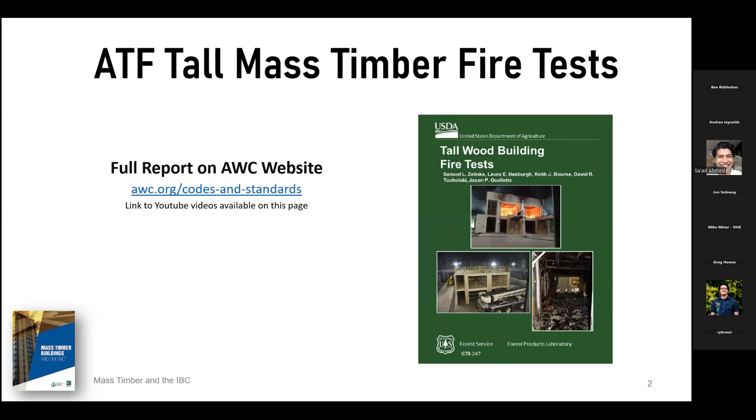So that's all with the ad hoc committee. Again, they came in there with 17 different code change proposals, some Group A, Group B stuff. If you're familiar with how the ICC code process works, they came in with 3 brand new types of construction, new heights and areas and number of stories, multiple fire safety requirements, some requirements for safety during construction as well, which we'll talk about towards the end here, and then some exterior wall tests and things like that.

But I think because they had so much involvement, all 17 proposals that they put forward all went into the code as recommended. If anybody's a glutton for punishment, if you want to go back, they do have the hearing videos, all the hearing documents, all that stuff. You can go back and watch those videos if you're ever interested, or if you can't fall asleep at night.

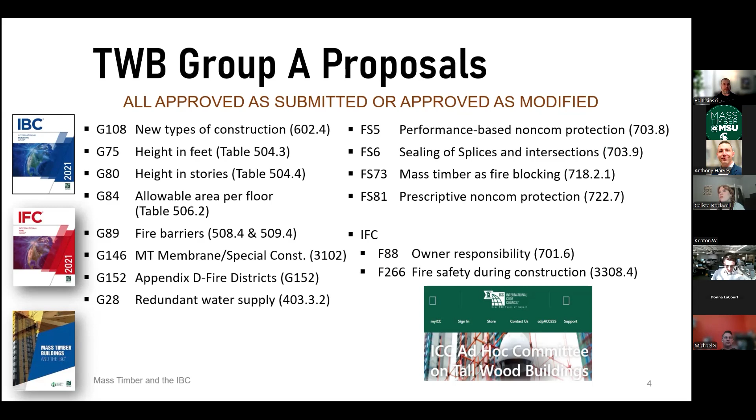These are those code change numbers for the Group A and then for the Group B. But again, we'll go through what these all are a little bit as we go here.

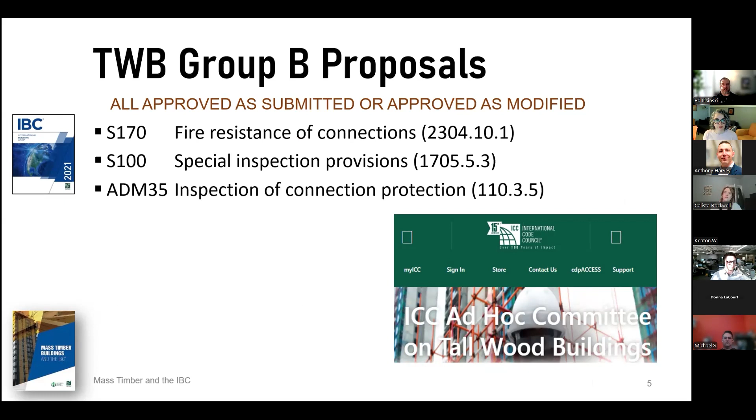So first off, we'll start off with definitions, and this one I always have to throw out there. We have MassTimber at Michigan State. We use MassTimber quite a bit. The actual, when you go into the code, definition of MassTimber is structural elements of type 4 construction, primarily of solid, built-up, panelized, or engineered wood products that meet the minimum cross-section dimensions of type 4 construction. The most important part of that is structural elements of type 4 construction.

So you can use heavy timber throughout the code. You can use heavy timber in type 1, 2, 3, 5 construction, as well as type 4 construction, of course. But if you're using it in type 1, 2, 3, or 5, it's technically heavy timber in the code. If you see a provision that says mass timber in the code, you're only talking about a type 4 building. So a lot of the buildings that we see, they're type 3 or they're type 5, but they're utilizing heavy timber elements - they're using CLT, glulam beams and columns, things like that. While a lot of people will call those mass timber buildings, and they're utilizing the same products as mass timber, they're technically heavy timber buildings, unless it's a 4A, 4B, or 4C, which is the 3 new types of construction that we'll get into in just a second.

That's when you actually have mass timber. So do keep that in mind. If you're going through the code and you see that term mass timber, that's now only pertinent for type 4A, 4B, and 4C construction. Anywhere that you see heavy timber, you can utilize that elsewhere throughout the code.

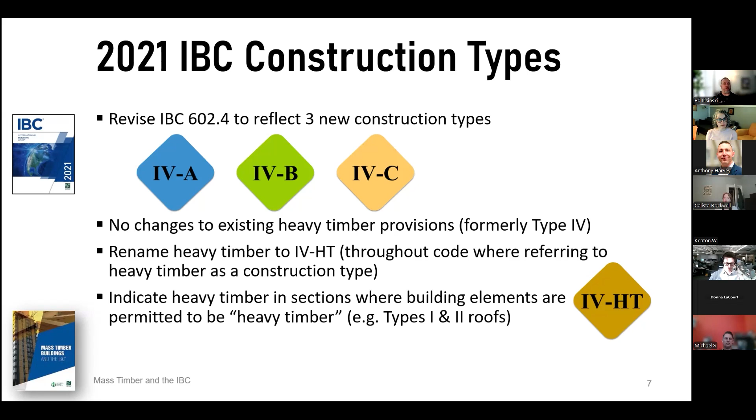Here's a little side-by-side comparison of those three new types of construction. Type 4A is going to be your biggest, tallest type of buildings. But the unfortunate thing for wood lovers is that 100% of the wood surfaces have to be covered up with non-combustible protection. So you're not going to see any wood when you walk into that 4A building.

I get asked all the time, why would somebody build to that? Well, there's still tons of environmental benefits, with sequestered carbon and things like that. There's speed of construction, there's lighter foundations. I'm preaching to the choir here, but there's a lot of benefits of still building with wood, even if you can't see that wood. That's going to be your biggest, tallest buildings out there.

Type 4B requires 100% non-combustible protection on all surfaces, with some limited exposed mass timber elements. So now we can have some ceilings exposed, some walls exposed, some individual columns exposed, things like that. We'll talk about when, where, and how much you can do as we go through this.

That's sort of your 4B buildings. Then your Type 4C - all that wood can be exposed, with three exceptions: the interior and exterior of shafts still have to be covered up with non-combustible protection, the exterior side of exterior walls has to be covered up, and concealed spaces again have to be covered up with some gypsum. But otherwise, for the most part, all your walls, ceilings, columns, and beams for the majority of the interior of your building in Type 4C can be left exposed, which is beautiful. But then that's going to be your shortest and smallest out of these three new types of construction.

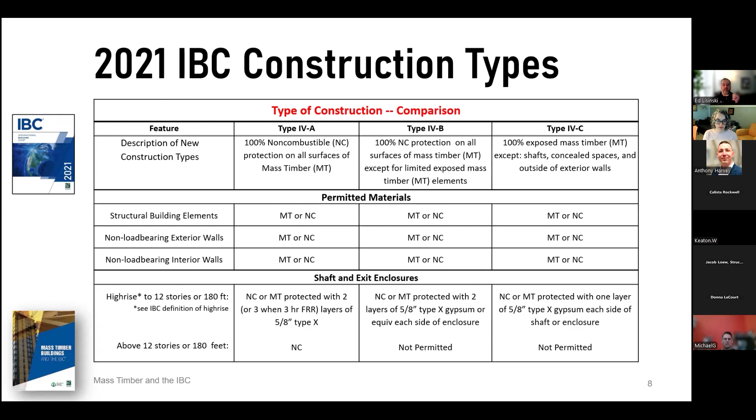So again, mass timber meeting those heavy timber sizes or non-combustible structural elements for interior and exterior walls. Down toward the bottom, the shaft and exit enclosures for Type 4A buildings - once you get above 12 stories, it's got to be a non-combustible stair and exit enclosure shaft. But otherwise, at 12 stories or less, you can use mass timber or non-combustible, and same thing with Type 4B and 4C. We'll talk about each of those as we go.

One last side-by-side comparison: Type 4A, non-combustible protection throughout. 4B, some limited exposure. 4C, pretty much you can leave all your wood exposed. We'll dive into a little more detail on each of these three types of construction.

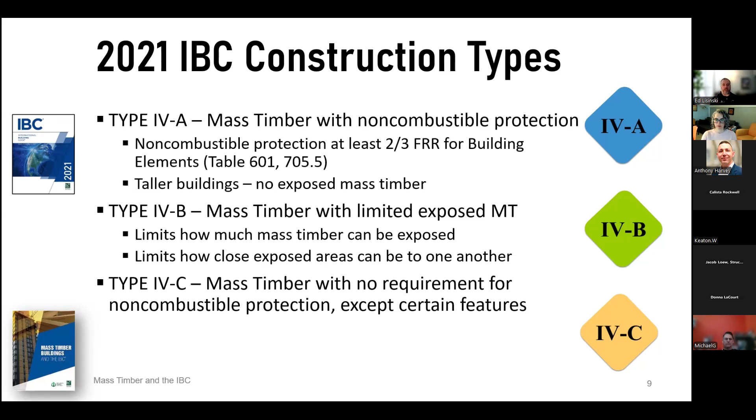All right, definitions, let me jump back to that. I mentioned it a little bit, but non-combustible protection for mass timber - that's non-combustible material in accordance with section 703.6, designed to increase fire resistance rating and delay the combustion of mass timber. Non-combustible protection for mass timber is going to be very important throughout the code. It's typically going to be 2/3 of whatever your fire resistance rating is, but we'll take a look at that in just a second. But again, this is just for mass timber - it doesn't apply to heavy timber if you're using that in any of those other types of construction.

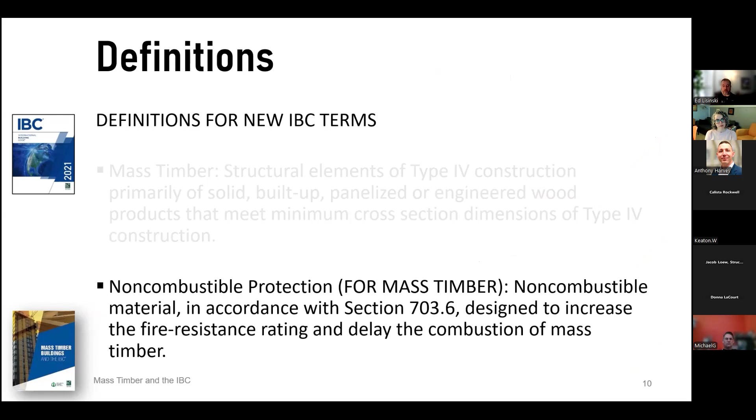So how do we come up with that amount of fire resistance protection that we need? Chapter 703.2.2 gives you all the different methods for establishing fire resistance in the code. One of those is fire resistance per section 722 - that's all the material specific stuff: concrete, masonry, steel, they've got their own sections in 722, as does wood. So one of those sections that was brand new in the code, 722.7, fire resistance rating of mass timber.

So I'm going to read this to you: the required fire resistance of mass timber elements in 602.4 - that's your occupancy chapters or your types construction chapters - shall be determined in accordance with 703.2. That's what we just looked at. That sent us here. The fire resistance rating of the building elements shall be as required in the code in 601 and 705.5. For the designers out there, if you're not familiar with table 705.5, that used to be table 602 - that's your fire resistance rating of exterior walls based off of fire separation distance. They moved it into chapter 7 with the exterior wall requirements. So as you're moving into the 2021 code, you'll see that table moved from chapter 6 into chapter 7 in 705. So that's what that table is if you're not familiar.

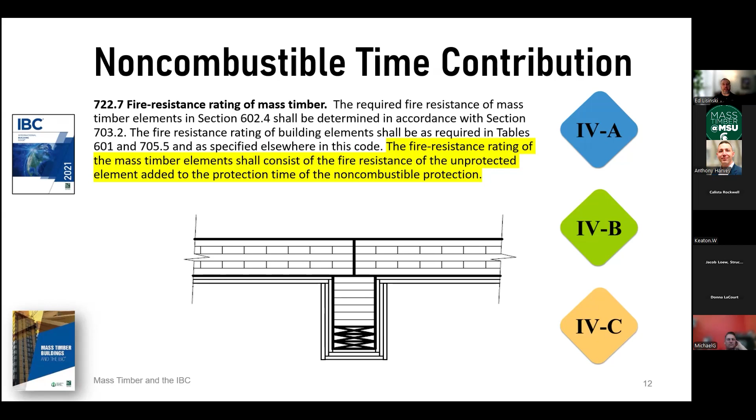The fire resistance rating of the mass timber element shall consist of the fire resistance of the unprotected element added to the protection time of the non-combustible protection. So as you guys are all aware, mass timber or heavy timber itself has some inherent fire resistance rating and some fire resistant qualities to it. So you're going to add how much mass timber itself has some fire resistance qualities, and then add the amount of protection given by that non-combustible protection to that, and that's going to be your fire resistance rating, of course.

So it goes on to talk to 722.7.1, which is your minimum time that's required, established by 602.4.1 through 602.4.3 - that's your 4A, 4B, and 4C construction. Non-combustible protection shall be provided for mass timber in accordance with 722.7.1(1) with that table. So let's take a look at that table in just a second here.

Here is your fire resistance rating based off of table 601 or 705.5, and then how much non-combustible protection you have - how much of that gypsum you need to put on there. So if you have a 1-hour wall, you need 40 minutes of non-combustible protection, of gypsum protection on there. If you've got a 2-hour column, you need 80 minutes now of non-combustible protection. And I say gypsum, but that could be any type of non-combustible materials installed there. And if it's a 3-hour floor, 3 hours primary structural frame, 120 minutes is going to come out of that non-combustible protection. So you'll notice that 2/3 ratio - you'll see that throughout the code. 2/3 is going to come out of the non-combustible protection, 1/3 is going to come out of the mass timber itself.

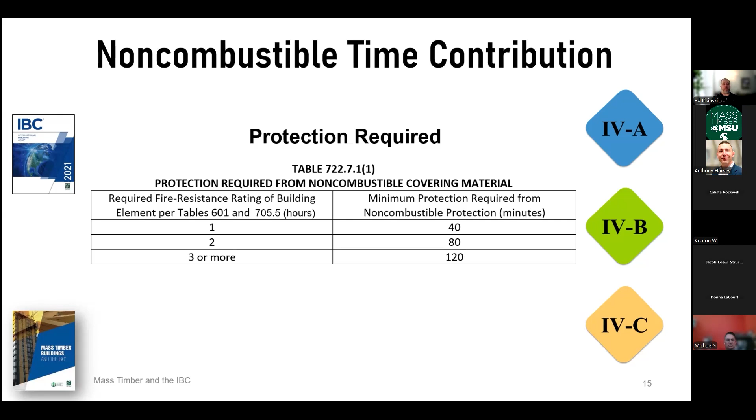Moving on to 722.7.1, the second sentence says the rating in minutes contributed by the non-combustible protection shall be established in accordance with 703.6. So 703.6 is going to give you a performance method of coming up with that non-combustible protection.

Basically you're going to run an ASTM E119 test, one test with just the mass timber on its own, and one test with the mass timber having a non-combustible protection, whatever you're trying to test. If the mass timber on its own burns out in 3 hours, and the mass timber with the non-combustible protection burns out in 4 hours, you compare the two times, 4 hours minus 3 hours, so whatever you put on that mass timber provided 1 hour of protection. That's the performance method.

You can go through that and say whatever we applied gives me 1 hour, or 40 minutes, or whatever that time difference is, and then put that into that table we just looked at. Not a lot of people are going to do that—it's obviously expensive and time consuming to run two ASTM E119 tests or UL 263 tests.

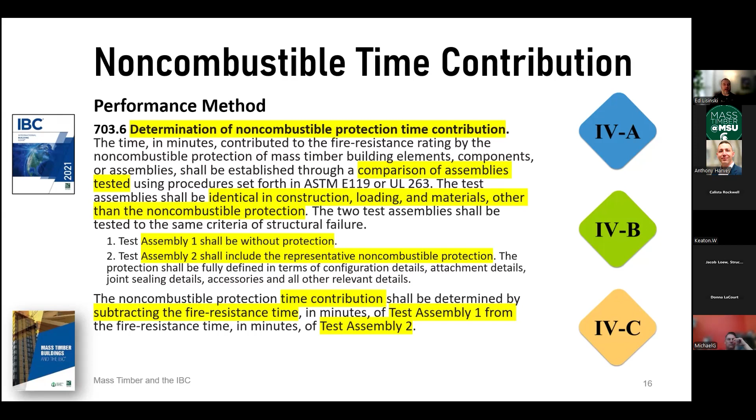But that is an option out there. It might be an option for newer products that come onto the market that aren't recognized by the code yet, or might not have an ICC-ES report yet. The last sentence of 722.7.1 says the protection contributions indicated in table 722.7.1(2) shall be deemed to comply when fastened in accordance with 722.7.2. So let's take a look at table 722.7.1(2).

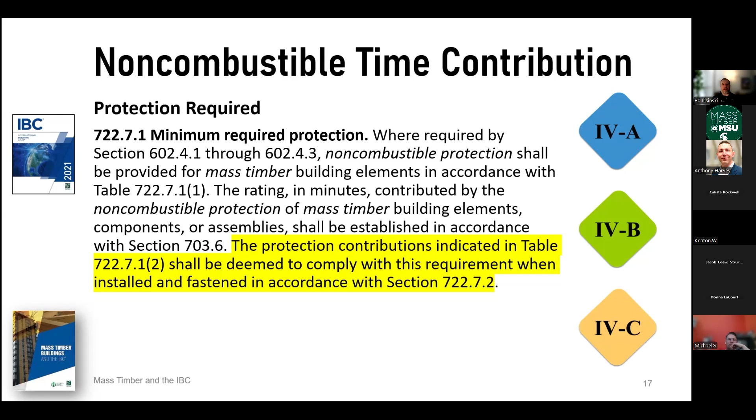That's going to again be a deemed-to-comply table, giving you a prescriptive option where 1/2-inch type X gypsum gives you 25 minutes, and 5/8 type X gypsum gives you 40 minutes of protection.

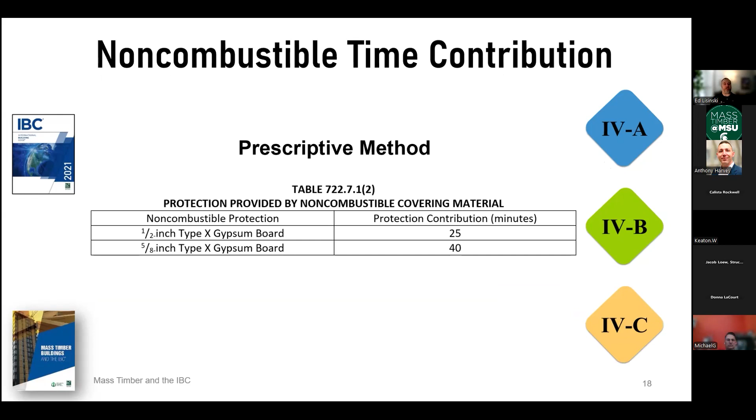Now if we compare those two tables together, it makes really obvious what everybody does with this. If you need a 1-hour wall, you need 40 minutes of non-combustible protection—well, one layer of 5/8 type X gives you that 40 minutes. If you need a 2-hour column, 80 minutes of non-combustible protection—2 layers of 5/8 type X gives you that 80 minutes. A 3-hour primary structural frame needs 120 minutes, and 3 layers of 5/8 type X gives you 120 minutes.

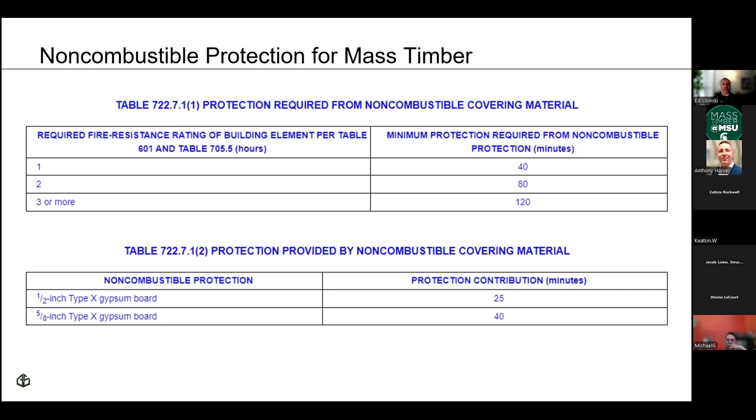So if you need a 1-hour fire resistance rating, put on 1 layer of 5/8 type X. For a 2-hour rating, 2 layers. For a 3-hour rating, 3 layers of 5/8 type X gypsum, and you're good to go. Again, then you don't have to go through any of that testing—that just gives you a prescriptive option in the code for how to comply with that fire resistance rating.

Now, it did say you have to install that correctly per 722.7.2. These are some of the rules in there—there are a couple others—but that non-combustible protection has to be tight to the mass timber itself, and screws have to penetrate at least 1 inch into the mass timber. Screws shall be spaced no more than 12 inches on center in each direction.

The tricky one is when you get into a second layer—the screws from one layer to the next have to have at least 4 inches of separation between them, they can't be closer than 4 inches to each other. So it's 12 inches on center for one sheet of gypsum, but when you have that second layer, you need at least 4 inches minimum separation from one layer to the next.

How do you do that? Good luck, obviously, but for the contractors out there, it's really just about laying out your screw pattern and making sure your contractors are aware of that rule. Make sure they're probably going to have to measure out where those screws go. Obviously, if it's only 2 layers, you can go 6 inches on center, and you've got a couple inches of leeway in each direction, but just make sure your drywall contractors are aware of that.

Screws go at the panel edges, between 1 to 2 inches from the edge. The panel offset from one layer to the next of gypsum has to be at least 18 inches. Once you get into 2 or 3 layers, that's just from the adjacent layer, so you're not worried about that 18-inch offset from the first layer to the third layer if you have 3 layers. You're going to have a stair step profile - we'll take a look at all that. Then the screw heads and panel joints all get covered up with joint compound.

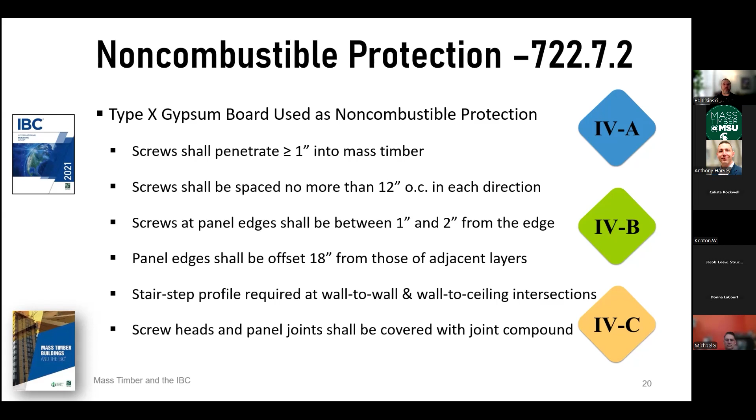One other thing not shown here: when you have that third layer, you can put furring strips in between the second and third layer to give you a little bit of space, which is sometimes helpful. So here's what that looks like graphically.

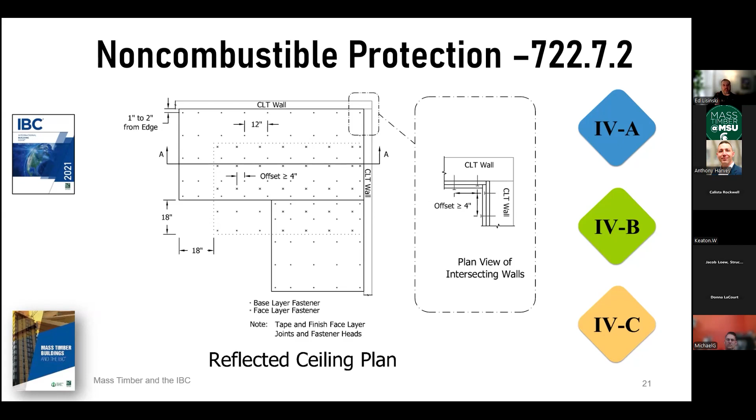You'll see on the wall detail in the corner on the right-hand side, we need that stair step profile into the corners. So if you need 2 layers of gypsum on the walls, do the first layer on the east wall, then the first layer on the north wall, your second layer on the east wall, your second layer on the north wall. You can't do first layer, second layer on the east, and then first layer, second layer on the north, because they don't want that seam going all the way through - they want to make sure you're covering up that seam as best you can.

Same thing on the ceiling - this is a section detail of a wall and ceiling intersection. Most contractors want to do both ceiling layers first if everything needs 2 layers - both ceiling layers first, then both wall layers. But again they want that stair step profile: first ceiling layer, first wall layer, second ceiling layer, second wall layer. You have to step those through like that.

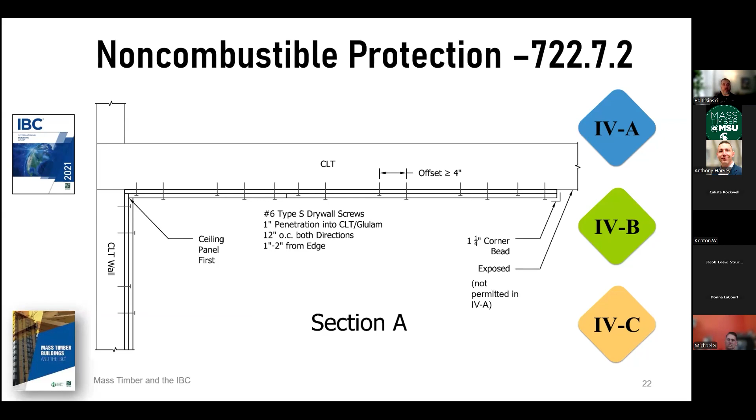That's all detailed in 722.7.2 in the code, and that's if you're going to use that prescriptive option. If you're not going to use that, if you're going to go through with the performance option, then it's going to depend on how that was tested and how that product itself works. I see a couple questions popping up, but I'll take those at the end - definitely keep getting those in as you go through.

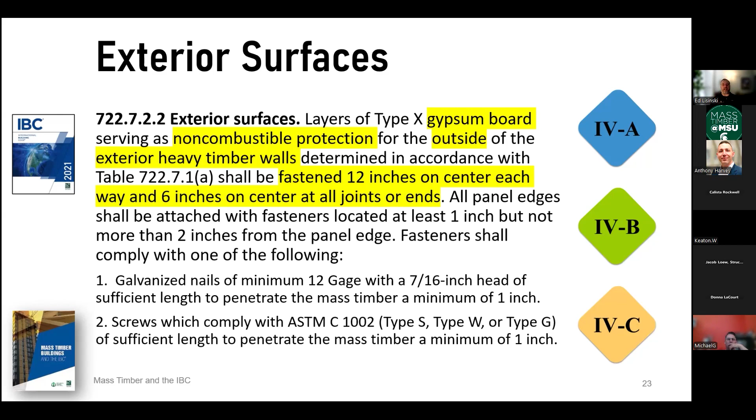722.7.2.2 talks about exterior surfaces - I mentioned this with the 4C, but also 4A and 4B, all 3 types. When you have an exterior heavy timber or mass timber, like a CLT panel, for your exterior wall, that all has to get covered up with at least 1 layer of 5/8 type X. There are nailing or screw patterns for that as well: 12 inches on center in the field, 6 inches on center on the joints and ends, and then some requirements for those exterior screws.

The type 4A actually matches type 1A for fire resistance rating. For the designers in the room, when you think about a type 1A building - that's your unlimited area, unlimited story, skyscraper, everything completely non-combustible type building - that level of fire resistance rating and protection is exactly what you have in a type 4A building. You've got 3 hours on your primary structural frame, 3 hours on your bearing walls, 2 hours on your floor construction, and 1.5 hours on your roof construction.

The provisions for the 4B and 4C were all taken from type 1B, so you'll see those all mirrored over. 2 hour fire resistance rating on your primary structural frame, 2 hours on your bearing walls, 2 hours on your floor, and then 1 hour on your roof construction for those. Again, your fire resistance rating is going to come in depending on whether or not you have that non-combustible protection. We'll talk about that as we go.

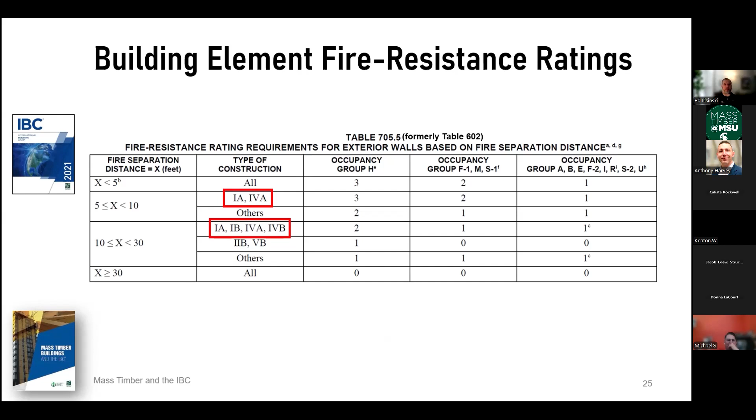All right, so exterior walls, we'll take a little cross section here of each of these different types of construction, starting with the 4A. This is an exterior bearing wall. So again, if you recall back here, exterior bearing walls are going to be 3 hours for type 4A.

So you'll have on the interior side 3 layers of 5/8 type X gypsum, and that's going to provide 120 minutes of the 3 hour protection. The other 60 minutes that's coming out of there is going to come out of the CLT itself, or the heavy timber element that's in there. So 2/3 of that is going to come out of that non-combustible protection.

Again, keep in mind that you have 1 layer of 5/8 type X required on the exterior side of exterior walls. And like I mentioned earlier, between that second and third layer, you can do a furring channel if you want to on that. Might be a good way to slide in a little bit of insulation, maybe hide some electrical conduit, things like that. But you are permitted to have that furring channel in there.

Keep in mind, if you are closer than 10 feet to a fire, if your fire separation distance is less than 10 feet, now you're also worried about fire coming in from the outside. So you would have 3 layers of gypsum on the exterior side of that exterior wall as well.

One thing I will mention while we're at it here, and I'm sure a lot of the designers are aware, we're going to talk about the CLT as an exterior wall. A lot of times in Michigan, same thing in Wisconsin here, just because of our climate zone and stuff, typically you're going to end up with a typical curtain wall system on the exterior walls, just so you can get that insulation value. I think I pulled that out of this presentation, but when you get into the energy code, if you have a thick enough CLT panel on the exterior wall, you can get into a mass wall situation where you need a lot less insulation on that. But for the most part, though, if you have a thinner CLT panel out there, you're not going to qualify as a mass wall, so you're going to have some decent insulation on there.

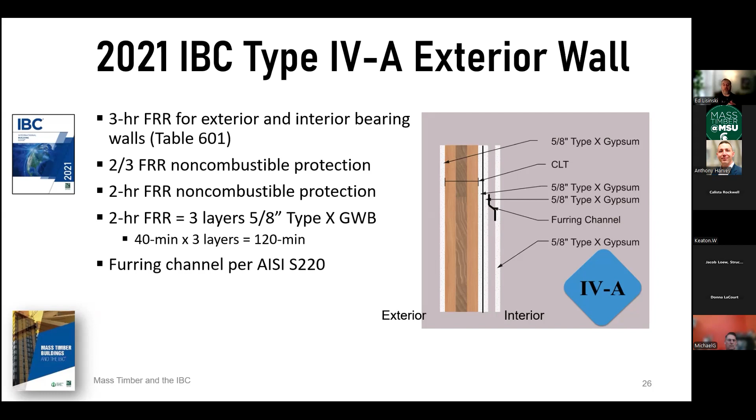Again, you obviously can't put it in that wall, and you need that non-combustible protection to be tight. You also can't have any combustible elements outside of the CLT other than a water-resistive barrier. So you can't put any combustible insulation on the outside. So again, that's where you'll get a lot of curtain wall systems, your typical curtain wall systems on the exterior of buildings up here in the northern states. But you still could possibly do it though with CLT. I don't want to discourage you from that.

Yeah, type 4A, we'll jump through that. Here's sort of a mock-up of what that 4A is going to look like. We'll go through each of these a little bit more with how much height and area and stuff you can have. But again, all the mass timber has to have the non-combustible protection, interior and exterior.

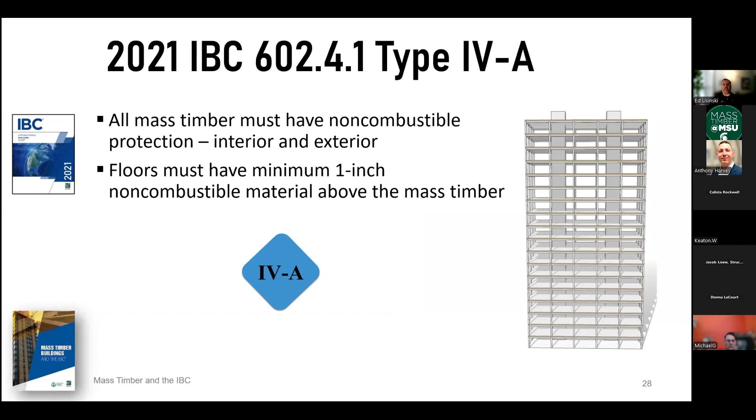And then floors do have to have a minimum 1-inch non-combustible material on top of the mass timber. I didn't mention that earlier, but there is a requirement in 4A and 4B for a 1-inch non-combustible material. Now that can just be lightweight concrete, gypcrete, something like that. It's different from that non-combustible protection that's required. This is just a non-combustible material. It doesn't have to be tight. You can have some insulation in there as well if you want to. But again, that's a requirement in 4A and 4B.

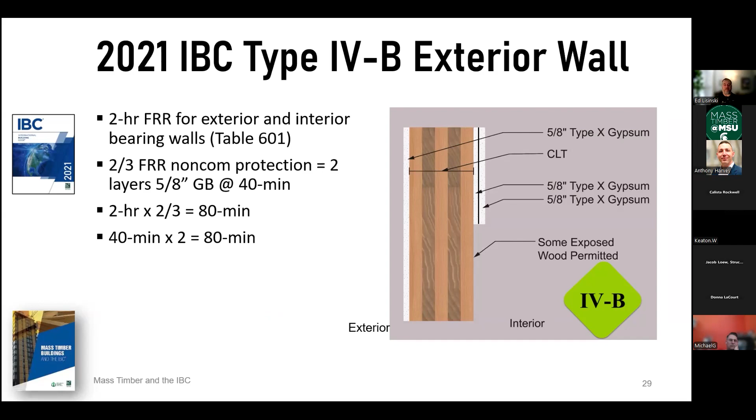Your 4B exterior walls, I'll jump through these quick because it's similar to 4A, but now it's a 2-hour exterior bearing wall. You can have your 5/8 gypsum, 2 layers on the interior, 1 layer on the exterior side of the exterior wall. And you can also have some exposed wood elements now on the walls that we'll talk about in just a second.

This is what that sort of looks like. Again, interior mass timber can be partially exposed. You've got non-combustible protection in certain areas, typically 40 minutes of the mass timber itself or heavy timber, and then 80 minutes of the non-combustible protection. And then again, you've got that 1-inch non-combustible material on top of your floors.

I've mentioned it a few times that you can have some exposed areas in type 4B. How much are we talking about? So you basically have 4 options here in the code.

The first option, unprotected portions of mass timber ceilings, including attached beams, shall be permitted and shall be limited to an area equal to 20% of the floor area in any dwelling unit or fire area. So let me break this down, because there's actually a lot going on in that sentence. So unprotected mass timber ceilings, including an attached beam - if you've got that ceiling and you've got a glulam beam that's tight to it, that's included in your ceiling area. So that 20%, you have to take the surface area of that beam and include that into your 20%.

Now it shall be permitted to an area. In the 2021 code, it says limited to an area equal to 20%. The 2024 code clarified that to say equal to or less than 20%. The way it's written right now, it almost says that you have to do 20%, but I think it's reasonable for any building official to think that you can have a little bit less than that too. So the 2024 code clarified that it's equal to or less than 20% of the floor area in the dwelling unit or fire area.

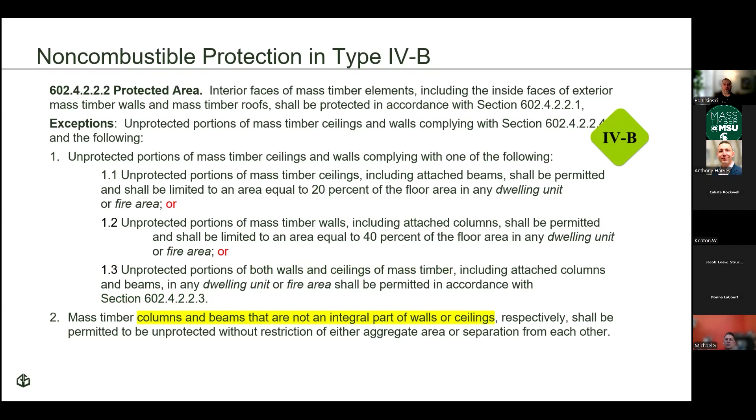Those fire tests they talked about earlier, this is what they tested out when they had some of these ceiling areas exposed. That's what that looked like. But we'll take a look at some examples here.

So this is an area of 20% of the floor area being exposed up on the ceiling. This is if you split that into two: now we've got an area of 10% of the floor area and another area of 10% of the floor area. That adds up to 20% of the floor area, and you can have that on your ceiling as well. Here's a total of 40% floor area exposed on the walls. You've got 20% on one wall and another 20% on the other wall. So here's that calculation I was mentioning earlier about option 3 that's in the code.

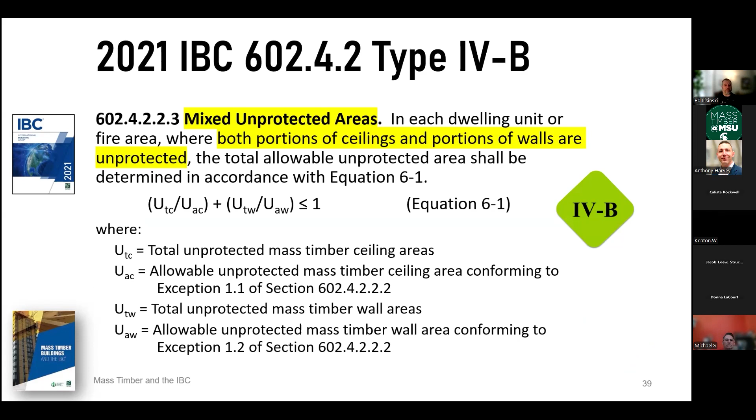So your mixed unprotected areas, you'll see that equation right there in the middle: your unprotected ceiling areas divided by your allowable unprotected ceiling areas, plus your unprotected wall areas divided by your allowable unprotected wall areas, being equal to or less than 1. So again, here's 50% of what you're permitted on the ceiling and 50% of what you're permitted on the walls. This would be just fine as well. And I'll mention, this is assuming that this room is one big dwelling unit, basically, or fire area.

All right, so here we go again. It's a 30 by 30 room, so we have a 6 foot by 30 foot area up on the ceiling, and that's 20% of your ceiling area, so that's fine. You'll notice you have that column attached to the ceiling — that's got to get covered up, because right now the ceiling takes up that full 20%. Again, yes, this one to this one, the area doesn't look the same that's exposed on the ceiling, but it's still dimensioned as 6 feet. So you can have that one-off column in the middle of the room exposed, and that does not take away from your ceiling area or wall area that you can have. You can still have that exact same amount of ceiling area exposed.

But now if you have that beam exposed, you've got a 12-inch by 18-inch beam in the center there. So you've got 1.5 feet on one side of that beam, 1.5 feet on the other side — that's 3 feet. You've got 12 inches on the bottom side of that beam, so that's 4 feet times that 30-foot length.

And so now you only get 2 feet of your actual ceiling that you can have exposed. You have to take into account the area of a beam that's touching the ceiling. If that beam was lowered, cutting through the dead center of the room, you could leave that exposed and still do your 6 by 30 area up on the ceiling. And then that column, because it's one off, is not going to detract from that.

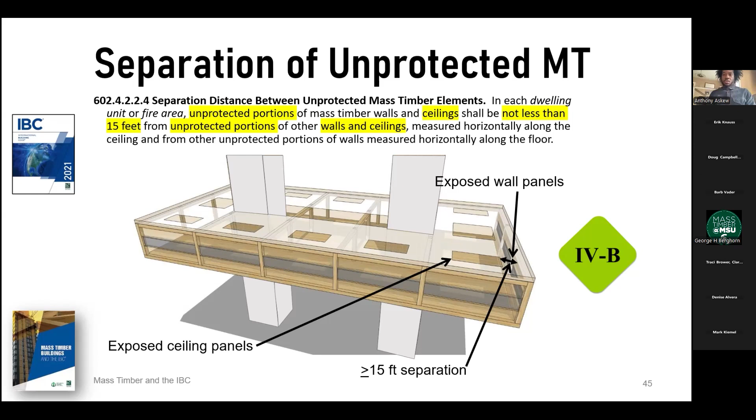While I'm talking about that, I'll give out one little plea. If anybody is going to go down to the code hearings for ICC for the 2027 codes down in Orlando in a couple weeks, the concrete industry has put in a proposal to put ceilings back into this and cut that ceiling area back down to 20% instead of 100%. So there's going to be a pretty good debate about that. Obviously, the concrete industry has their own reasons, but they say they have testing that shows 100% is wrong, and that not having that 15-foot separation for ceilings is wrong. We're obviously going to fight it, but if anybody else is down there and wants to help, feel free to let me know, and I can get you the hearing numbers and all that stuff.

So concrete is attacking mass timber as we speak for the 2027 codes. But anyway, in the 2021 code, you do still have the ceiling area exposed needing that 15-foot separation. So if you have two ceiling areas, you need a 15-foot separation between them. It seems kind of dumb when you think about it, right? You can have one big area, but as soon as you split that into two areas, now you have to move them apart. What's the difference? But it's in the code. Same thing, a ceiling area to a wall area needs that 15-foot separation. So this is what's in the 2021 code.

Again, in the 2024 code, you don't have to worry about this with the ceiling areas. The only thing in the 2024 code that you do have to worry about is this situation: a wall to a wall exposure, 15 foot. And again, that's only in 4B. In 4C, you can have everything exposed.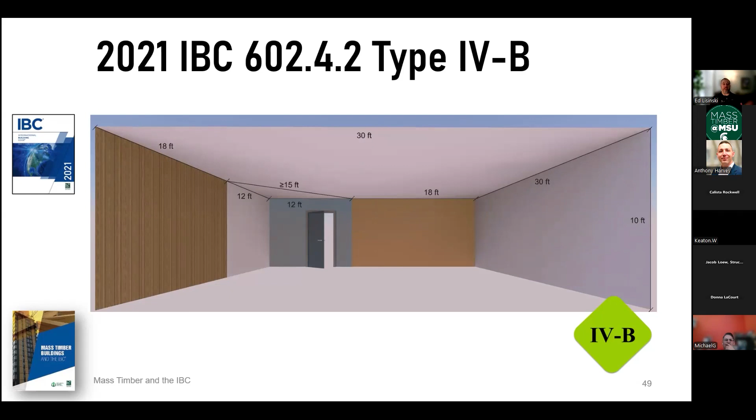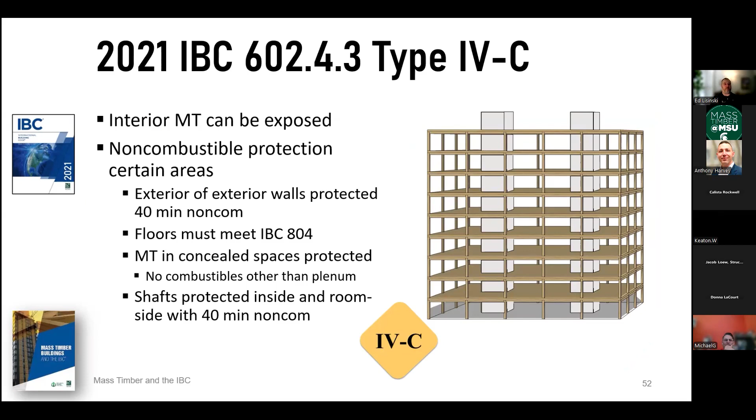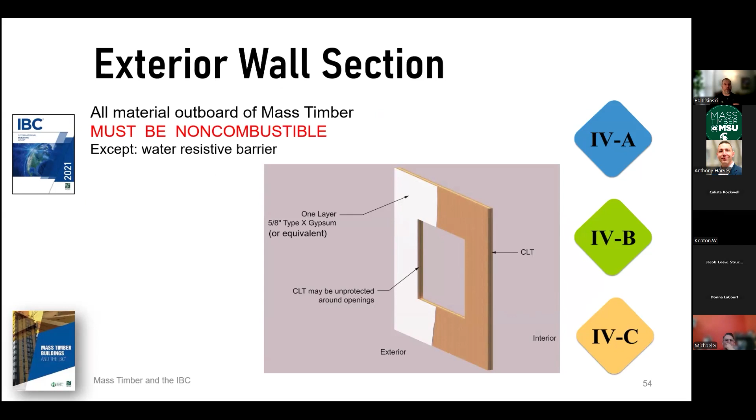So we'll jump through here. In 4C, everything can be exposed. This is what that kind of looks like side by side. You don't need that 1-inch non-combustible topping on the floors there, so you could leave those floors exposed if you want in a 4C. You don't have to have any non-combustible protection on the interior, but you do still need your 1-layer 5/8 type X on the exterior side of the exterior walls. And again, as I mentioned earlier, all material outboard of the mass timber exterior wall has to be non-combustible, with the exception of the water-resistive barrier that's on there. And there are already some projects being used for that.

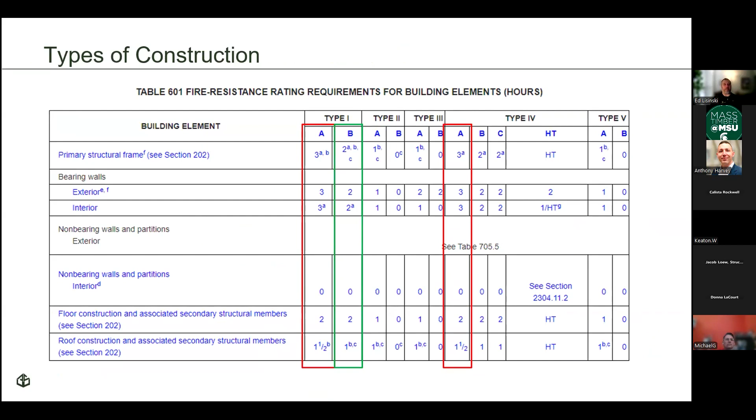So, types of construction -- we actually looked at this already. Oh yeah, I knew I had this somewhere where it showed the 1A and the 4A getting matched up, and then the 1B and the 4B getting matched up, but we already talked about that.

One other thing I do like to point out, in these mass timber buildings, one of the things that the Tallwood Ad Hoc Committee wanted to make sure was that there was a good, reliable sprinkler system in these type 4 buildings.

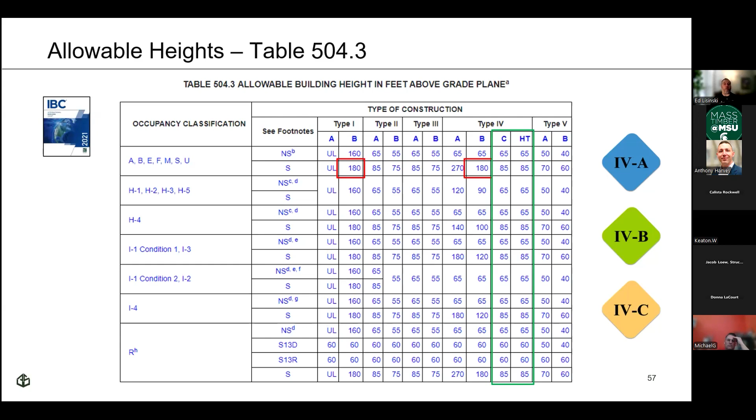A lot of people ask why there's even a non-sprinklered option in these height and area tables. But if you go across that top line for non-sprinklered A, B, E, F, M, S, and U's, you'll notice that what you've always been permitted for the old traditional type 4 buildings, now the 4HT, the 65 feet, if you don't sprinkler your building you're capped at that 65 feet all the way across. So there's no advantage to not sprinklering. You're capped at what you've always basically had for height of these buildings.

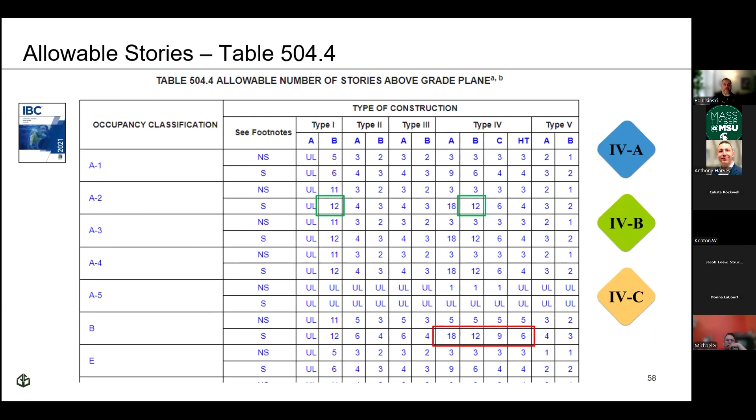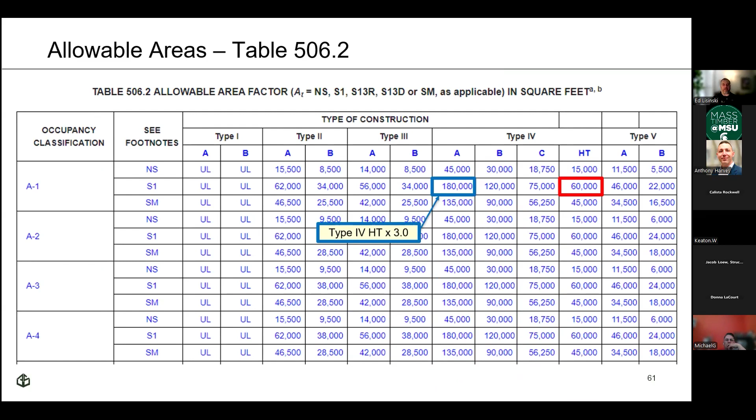For allowable areas, this was all just straight math. They took the traditional type 4 buildings, multiplied it by 125% to get to the 4C areas, doubled it to get to the 4B areas, and then tripled it to get to the 4A areas. That was all straight math across the board of how they came up with those numbers.

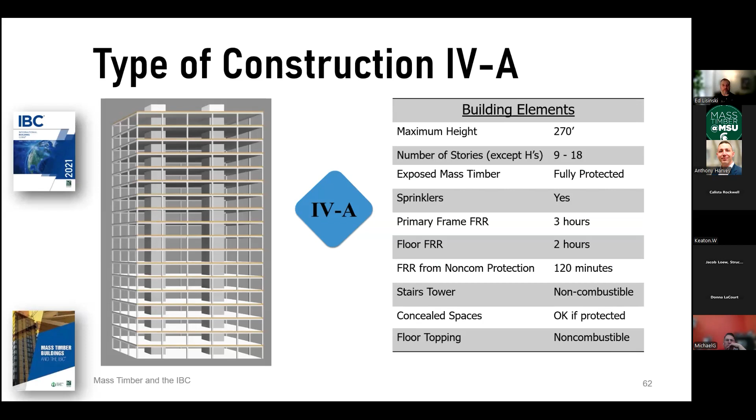So one final recap here on the 3 types of construction. Type 4A, maximum height is 270 feet, number of stories 18 stories, fully protected mass timber, so you're not going to see any mass timber exposed anywhere throughout there. Again, 3 hours on your primary structural frame, 2 hours on your floor, and then that 1-inch non-combustible topping on those floors.

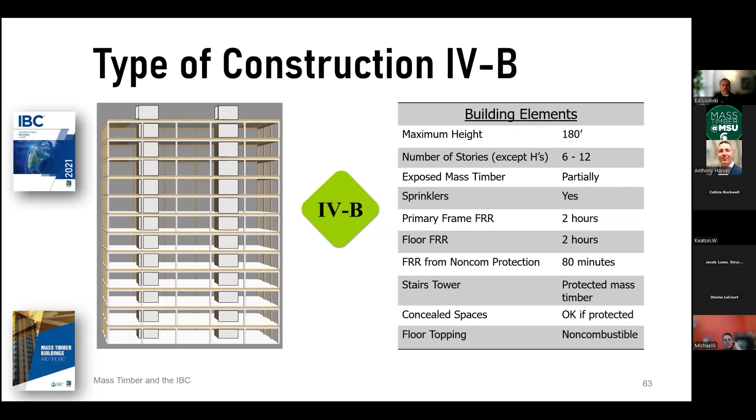Type 4B, 180 feet maximum height, 12 stories maximum, partially exposed mass timber, 2-hour primary structural frame, 2-hour floor framing fire resistance rating, and that 1-inch non-combustible floor topping as well. Type 4C, 85-foot maximum height, 9 stories maximum, fully exposed mass timber other than those couple areas that I mentioned. No requirement for that floor topping, but still a 2-hour primary structural frame, 2-hour floor fire resistance rating.

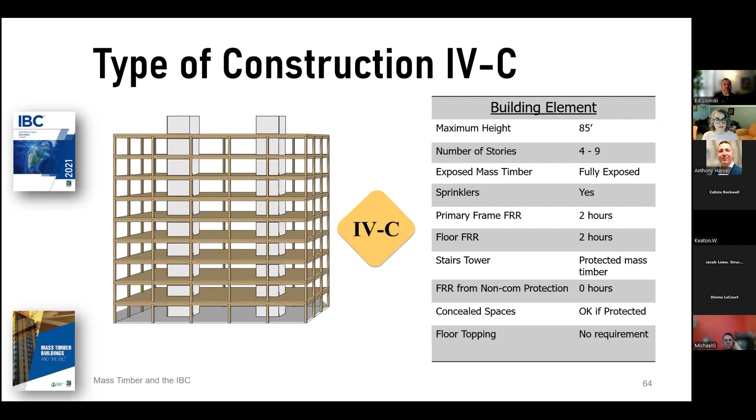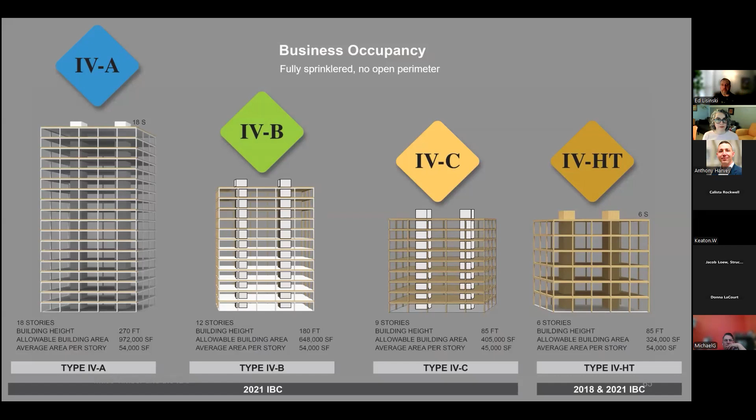Here's all 4 of those kind of side by side, that's sort of the money shot. I showed this out in Michigan in December as well, but all 4 of those types of construction for type 4 all together there.

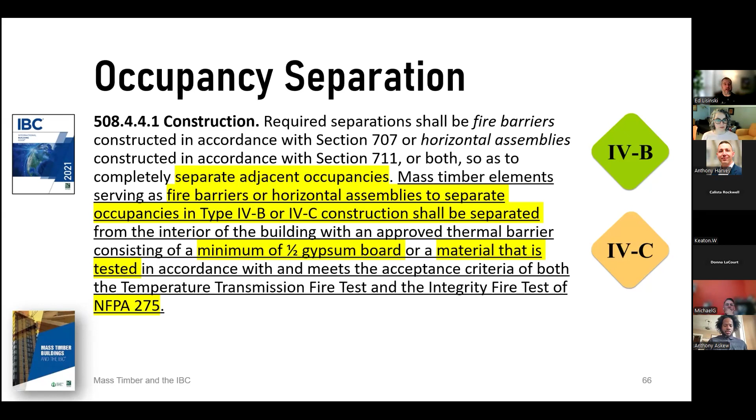Construction occupancy separation in a 4B and 4C occupancy: there is a requirement to have at least 1 layer of 1/2-inch gypsum on each side of a required occupancy separation. So even though you can have some exposed areas, that's another area then when you do have an occupancy separation where you do need that 1/2-inch gypsum or equivalent.

Same thing with incidental use separations. Again, that 1/2-inch gypsum is required in there.

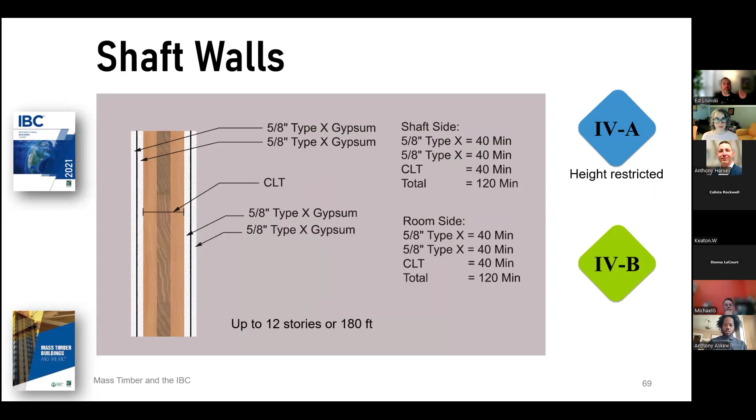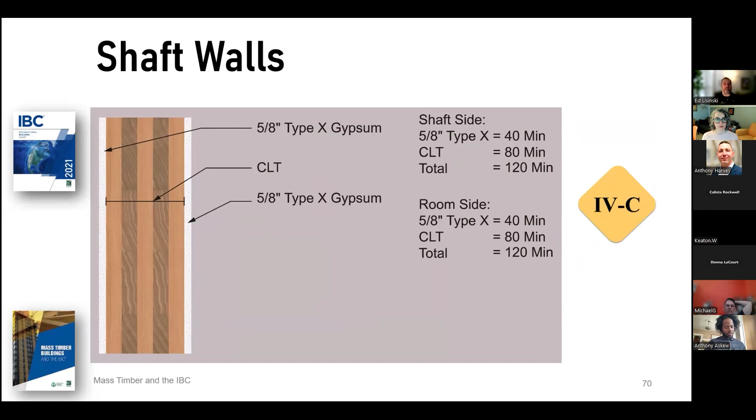Shaft walls, I think we've already touched on these a bit, but you need 2 layers of 5/8 type X on the interior, on the shaft side and the room side of shafts in 4A and 4B. And keep in mind that 4A is capped at 12 stories. And again, the CLT is going to come up with the rest of that fire resistance rating. Type 4C, you need 1 layer of 5/8 type X in there, so if it's a 2-hour shaft, 80 minutes now is actually going to come out of that CLT.

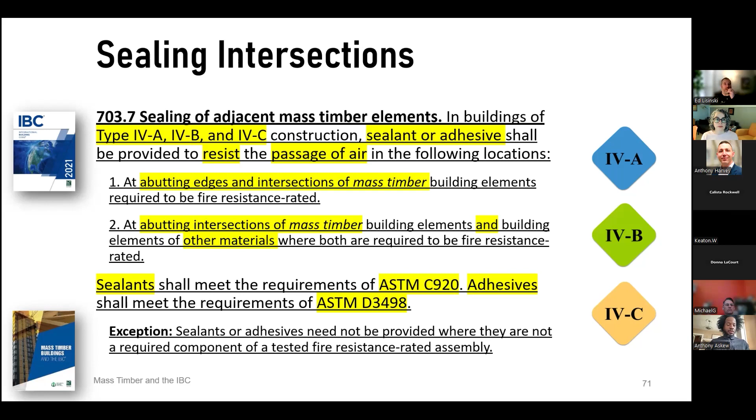We restricted this down a little bit so you don't have to do it everywhere—it's really just where it makes sense. We took out the requirement if you have a fire resistant joint system, you don't have to do it. But again, that's all coming into the 2027 code, so that'll be a ways off, though it might be grounds for a variance for you guys down the road. There is a periodic special inspection of that sealant that we'll talk about.

You can use mass timber for fire blocking materials in the code now. That got added into the list of fire blocking materials.

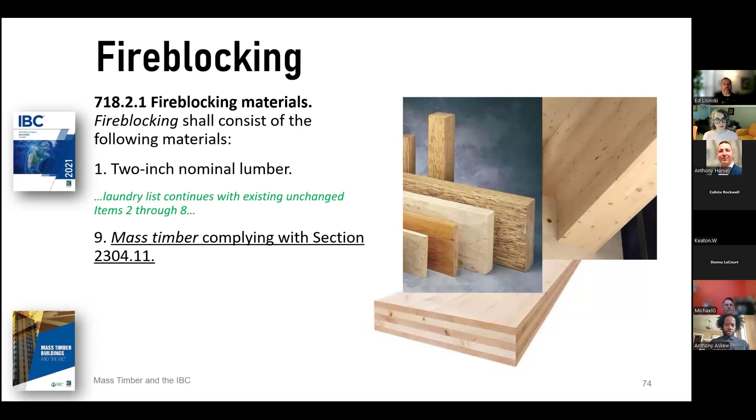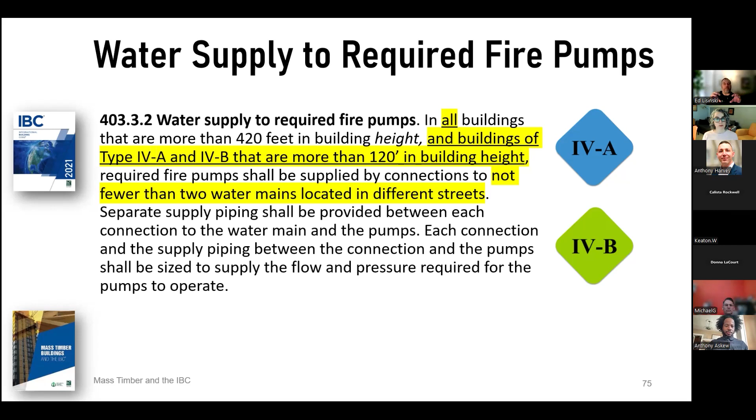There is a requirement for a redundant water supply once your 4A, 4B buildings get up over 120 feet. So if anybody in here designs a lot of high rises, you've probably seen this before—once you get up over 420 feet, you need that redundant water supply, a water pump or water supply coming into a fire pump off of 2 separate streets. Well, again, for 4A, 4B, once you get up over 120 feet, you also need that same requirement.

Concealed spaces—I'm just going to jump through these real quick. For 4A, 4B, you need 2 layers of 5/8 type X. For 4C, you need 1 layer of 5/8 type X. For 4HT, I mentioned this earlier, but again you have 3 options: sprinkler it, fill it completely with non-combustible insulation, or drop in and cover everything up with 1 layer of 5/8 type X. Same 3 options that are offered in NFPA 13 for type 4 construction.

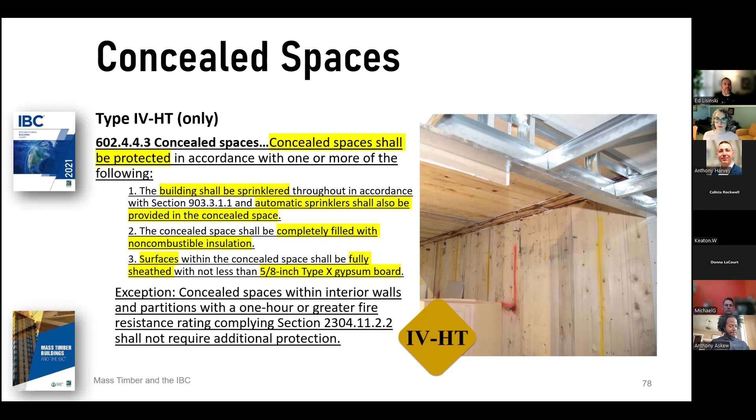Yeah, that's just a method on the concealed spaces. They did test concealed spaces with the fire tests.

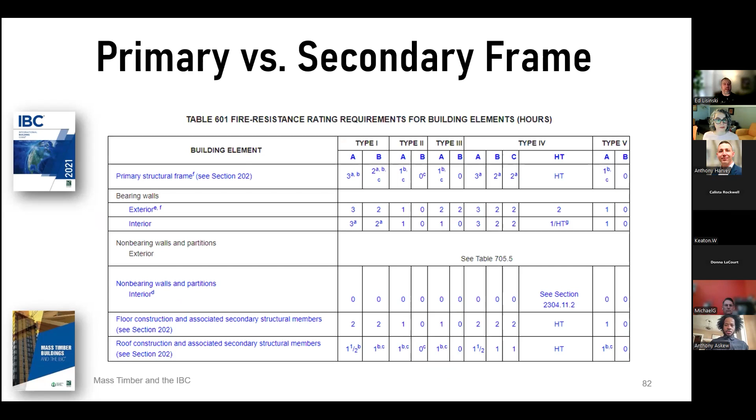We talked about the primary structural frame a couple times—there were some changes to it in the 2021 code that you should be aware of. It's really just the columns, the structural members having direct connection to the columns, members of the floor construction having direct connection to the columns, and members that are essential to the vertical stability of the primary structural frame under gravity loading. So we're not talking about wind, seismic, or any lateral forces—it's just what you need for that gravity loading. If there's any bracing required for that, that's actually part of your primary structural frame now as well. Everything else is a secondary structural member.

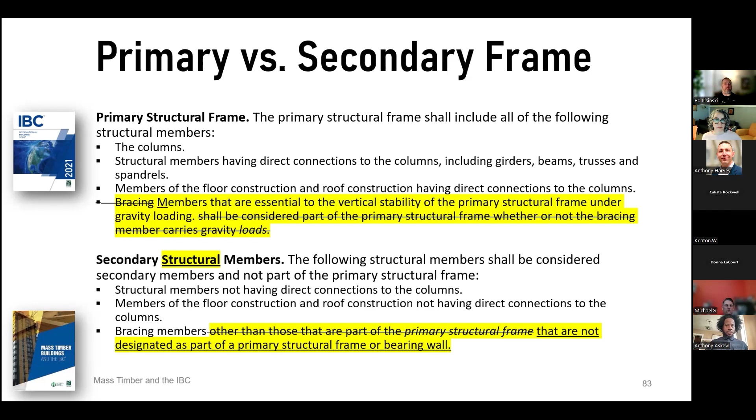So when we get that 3 hours for the 4A, or the 2 hours for the 4B and 4C, that's what we're talking about with the primary structural frame. That got tweaked a little bit in the 2021 code. There's some requirements in the International Fire Code, but I don't think that's pertinent to Michigan, so I'm going to skip that slide.

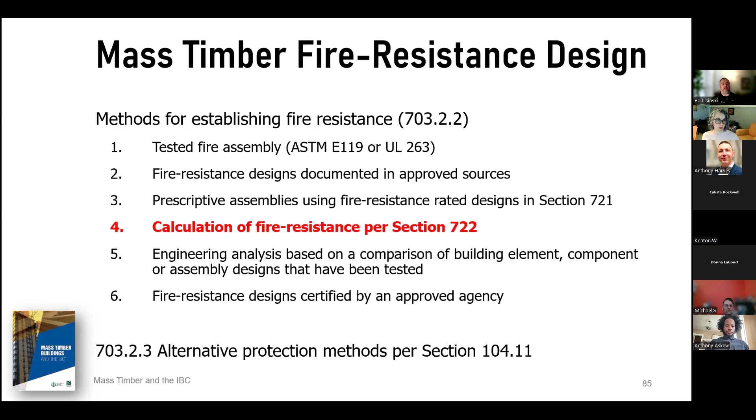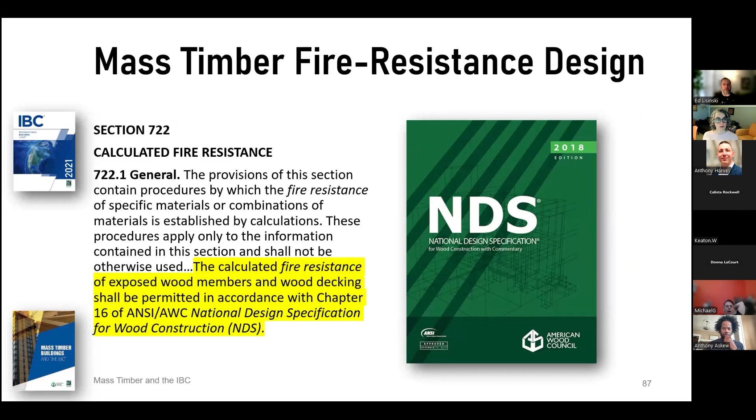We talked about fire resistance design a little bit already, but again, 722.1 gives you all the different wood or material specific ways of coming up with fire resistance design. 722 is going to refer you to the NDS—the 2018 NDS for the 2021 code. We also have another document called Technical Report 10, which is calculating the fire resistance of wood members and assemblies. Some of you may be familiar with that; it's sort of the supplemental document that we have. So again, chapter 16 of the NDS is going to give you fire resistance design.

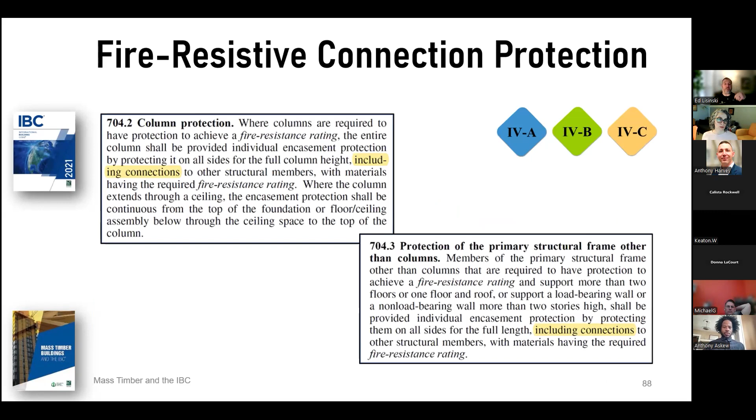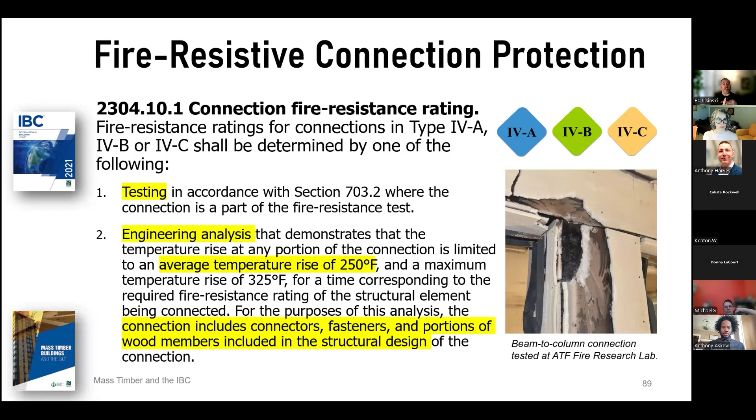The reason that's important is, throughout chapter 7, when you do fire resistance of structural elements, you also have to include those connections, right? A new section in the code, 2304.10.1, talks about that connection fire resistance rating for protecting those connections in the 4A, 4B, and 4C. So you can test a connection as part of an assembly—if you're running an ASTM E119 or UL 263 test, you can do that connection in there. Otherwise, you can go through engineering analysis, and that's what we have in the NDS. So make sure that you are protecting those connections.

Typically in the NDS, what we have is you can do some additional wood cover to protect those connections. You can do gypsum on there, or other approved materials, or a combination. What you're seeing more and more, though, is obviously for those hidden connections, using additional wood cover—especially when you have a glulam beam to a glulam column type connection. You're seeing a lot of that, especially when it's going to be exposed, having those hidden connections in there.

We also have our latest document, the Fire Design Specification, FDS. We're trying to get that into the 2027 code, but for the designers out there, it's basically a fire design guide similar to the NDS, all for wood. All the stuff from chapter 16 is pulled into there, all the stuff from the TR10 is pulled into there—so a lot of great information in the FDS. That is an ANSI approved document.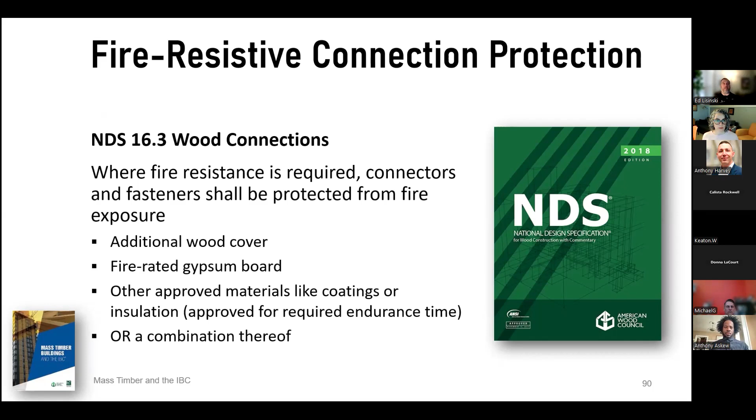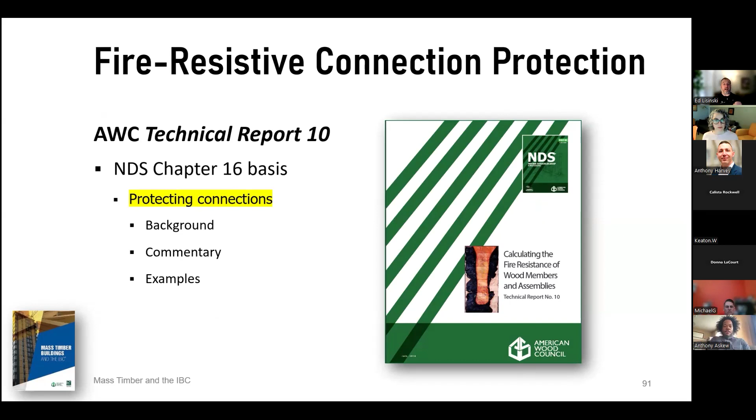We've gotten it approved into some of the sections in the 2027 IBC coming up. That TR10 I mentioned, for protecting connections, it's going to give you background commentary, some design examples of how to protect connections, also a whole bunch of information on the testing and where that stuff came from. So a lot of great information there.

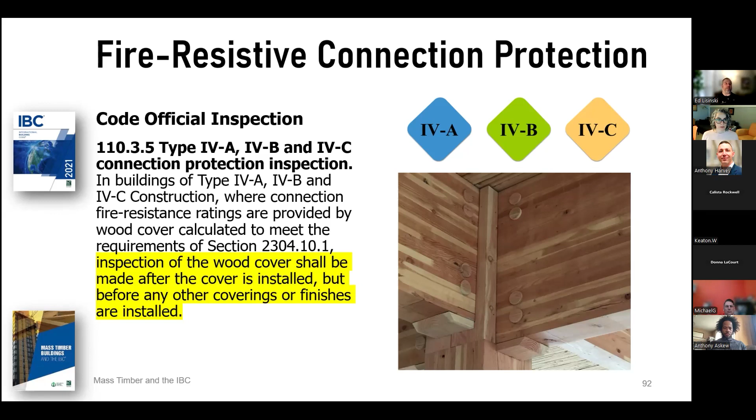Jumping back to some of the code requirements now, code officials do have a requirement to inspect hidden connections prior to wood cover being installed. So if you do have hidden connections in there, before they cover those up, there is a requirement to have those inspected.

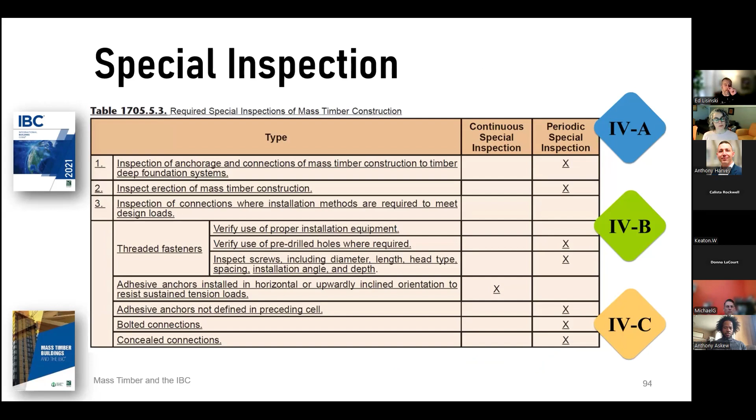There were some special inspections for Mass Timber. This is the list of the table. You'll see it's mostly all periodic inspections, with the one exception being the continuous special inspection for adhesive anchors. It's really pretty similar to special inspections that you get for precast concrete type construction as well.

So special inspections, I'll jump through that again. I already mentioned that there is a special inspection for the sealing of Mass Timber.

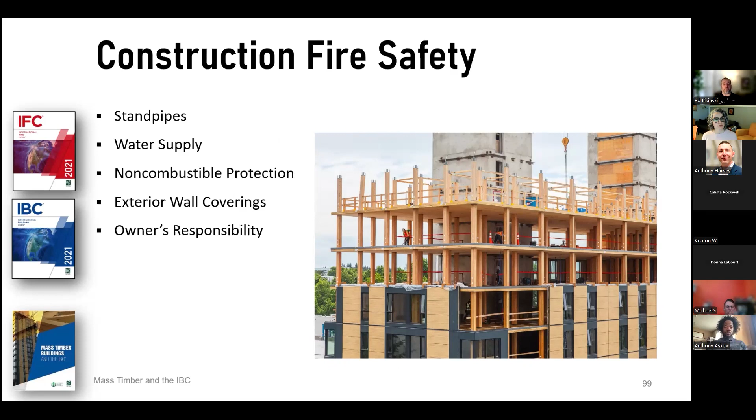All right, construction fire safety. This is the last thing here, and then I'll wrap this up. So while that building's going up, you've got some construction fire safety issues you'll want to be aware of, especially for the contractors here in the room, but also for the designers as well. This is per the International Fire Code, and it's also reflected in the IBC, in Chapter 33.

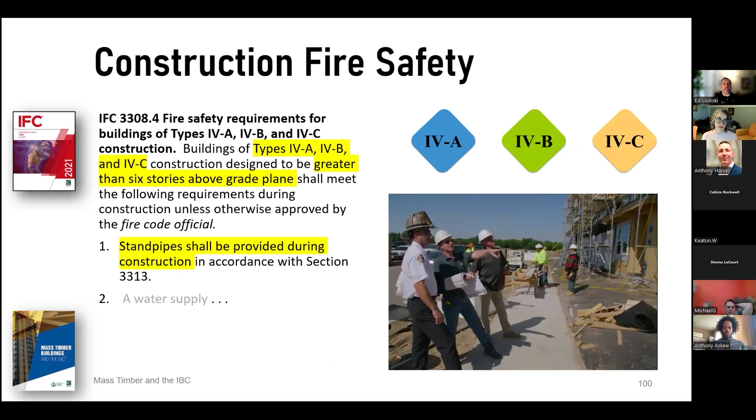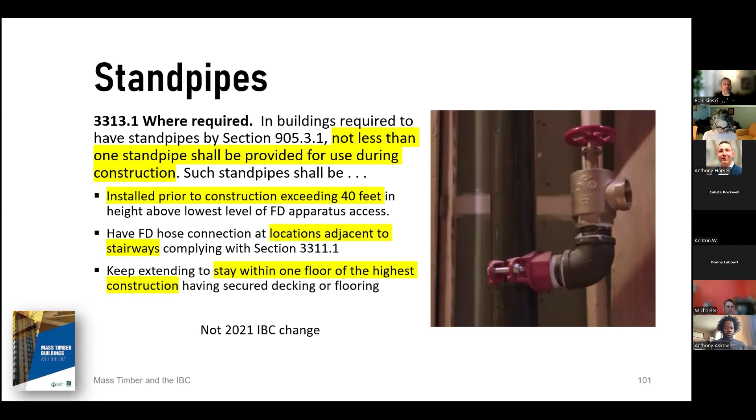Different types of construction here, but standpipes are going to be required in accordance with Section 3313. As you're going up with the building, those standpipes have to be within one floor of the highest level of construction you're working on, in at least one of those stair towers. Also, a water supply for the fire department operations as approved by the fire code official and the fire chief - that's a requirement in there.

I'm going to stop here and talk about fire departments real quick. So in Michigan, everything we're talking about here, the IBC stuff, that's all coming in for 95% of your occupancies that are out there.

However, the Michigan State Fire Marshal's Office actually handles occupancies for inspections, permits, and everything for educational occupancies and for healthcare occupancies. Unfortunately, that is covered by their own fire code, which is still on a much earlier version of NFPA that does not have any of this stuff in there.

Sandra and I actually met with them back in December. They are open to using a newer version of the NFPA codes, NFPA 5000 or NFPA 101, which has pretty much these very similar provisions in there. But again, if you have an education occupancy or a healthcare occupancy and want to start using some of these provisions, start having that conversation with the State Fire Marshal's Office as early as you can.

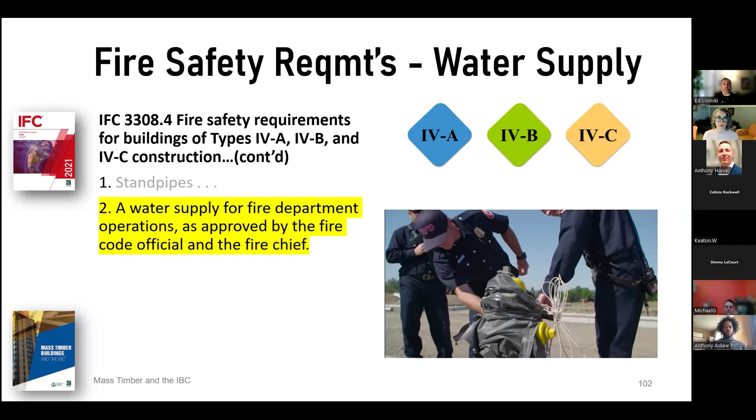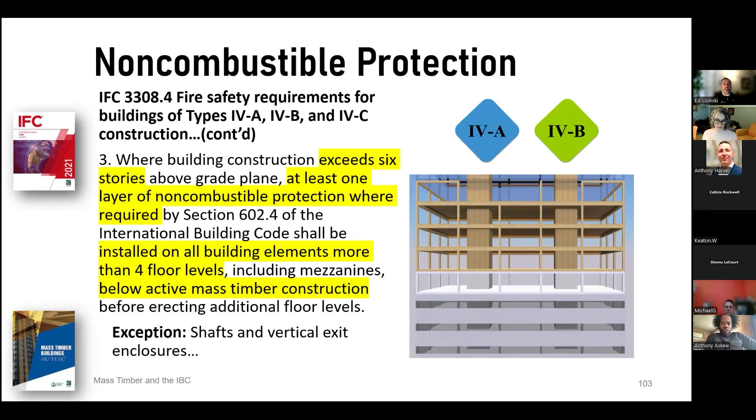All right, the third item on construction fire safety is non-combustible protection. You need that within 4 stories of the level you're working on once you have at least a 6-story building. So you'll see right here that the non-combustible protection is going up on those lower 3 stories. Before they can start working up on the next story, before they can get up to the 9th floor, they have to have that non-combustible protection on the 4th floor.

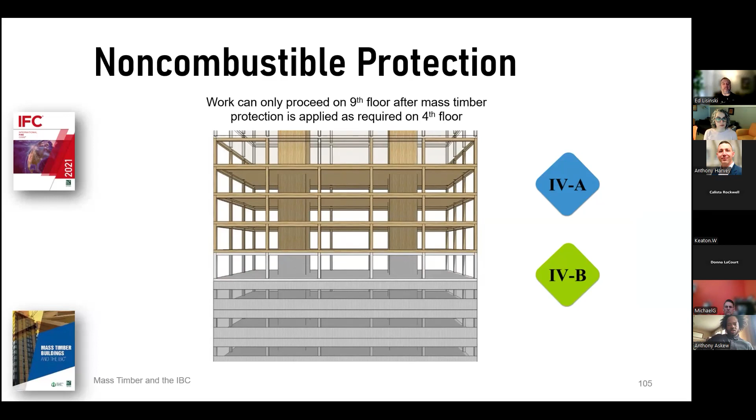So basically building that up, and that's just one layer - you just have to have the base layer. So if you need 2 layers or 3 layers, you just at least have to have that first layer on. And then same thing on the exterior of the building - that has to go up in the same fashion as you're going up if you have exterior walls of CLT.

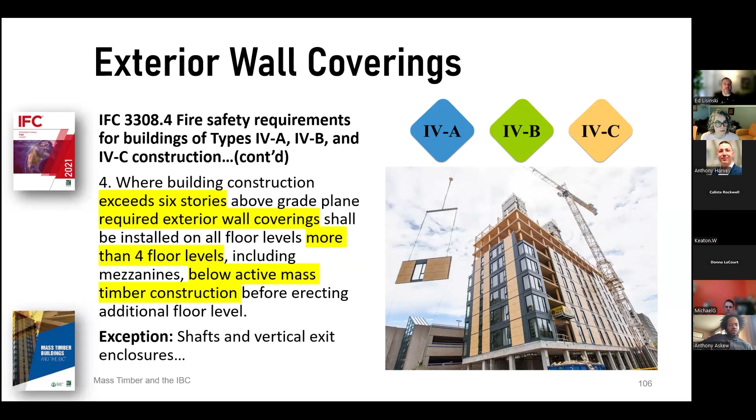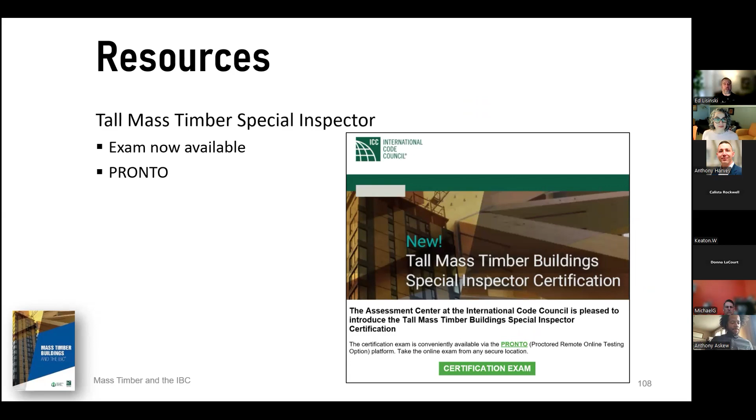Some resources - I mentioned this Mass Timber Buildings and the IBC book. That's out there, there's a PDF version, there's a print version. ICC does have special inspector certifications for Mass Timber. We've got all of our standards out there, feel free to use that stuff. I should put the FDS on here for a future one. All right, and that's all I got.